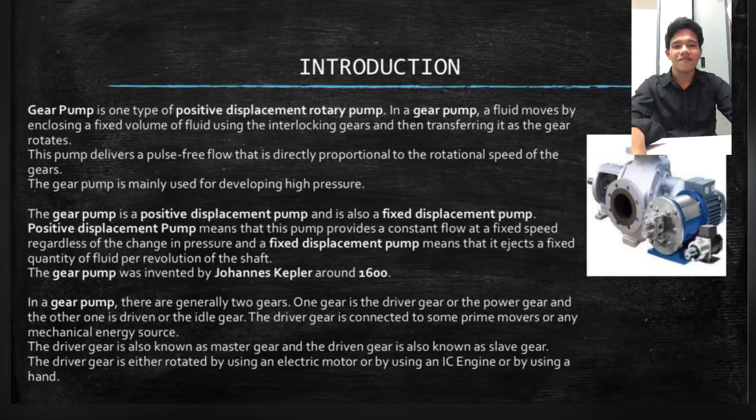Next slide. I will present to you about components of a gear pump and function of components of a gear pump.

This is a component of a gear pump. We have driver gear. Secondly, we have driver shaft. Thirdly, we have casing. Fourthly, we have driven gear or idler gear. Next, we have inlet, which is low pressure fluid. And fifthly, we have outlet, which is high pressure fluid.

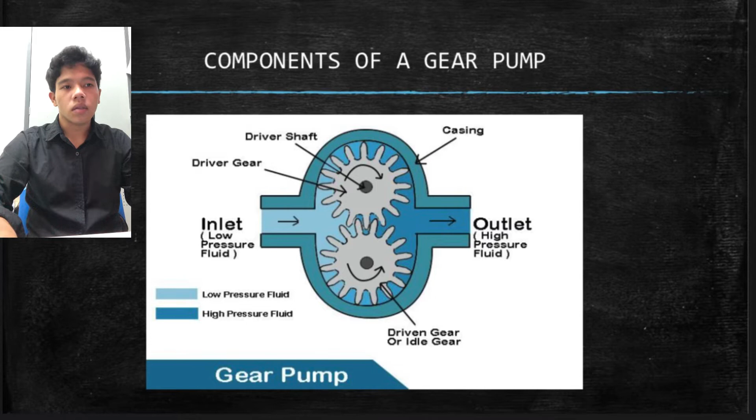Function of component of gear pump. Point number 1, driver gear. Driver gear is connected to the prime mover. It rotates using the power from the prime mover.

Point number 2, driven gear or idler gear. The driven gear is in mesh with the driver gear and rotates as the driver gear rotates. Point number 3, casing. Both the driver gear and the driven gear are packed inside the casing of the gear pump.

Point number 4, inlet section or suction side. It is the section in the gear pump through which fluid enters the gear pump. Low pressure liquid enters the pump from the inlet section. Point number 5, we have outlet section or discharge side. It is the section in the gear pump through which pressurized fluid is delivered to the required area. High pressure liquid flows out from the pump from the outlet section.

Point number 6 is prime mover. In the gear pump, the prime mover is used to provide power to the shaft in which the driver gear is mounted. It can be an electric motor or an IC engine, or it can be manual labor.

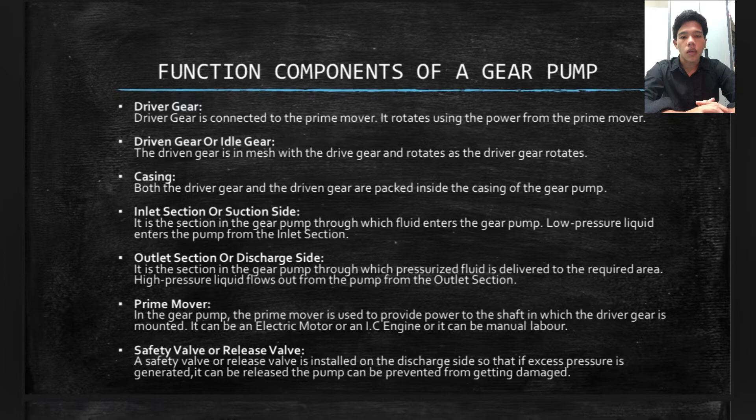After that, I will present to you about the operating principle of gear pump. At starting, the gear pump is started by providing power to the driving shaft, and the driving gear starts to rotate using the power from the prime mover.

Point number 2, the driven gear, which is in mesh with the driver gear, also rotates as the driver gear rotates, but in the opposite direction. Point number 3, as both the gears start rotating, a partial vacuum is created on the suction side.

As the vacuum is created, the liquid in the suction side gets sucked toward the gears. After that, the sucked liquid gets trapped between the gears and the casing. Point number 4, then the trapped liquid between the casing and the gear teeth travels along with the rotation of the gear teeth and moves from the suction side toward the discharge side.

Similarly, the liquid flows from the suction side to the discharge side in the idle gear also, and high pressure liquid leaves the pump from the discharge side.

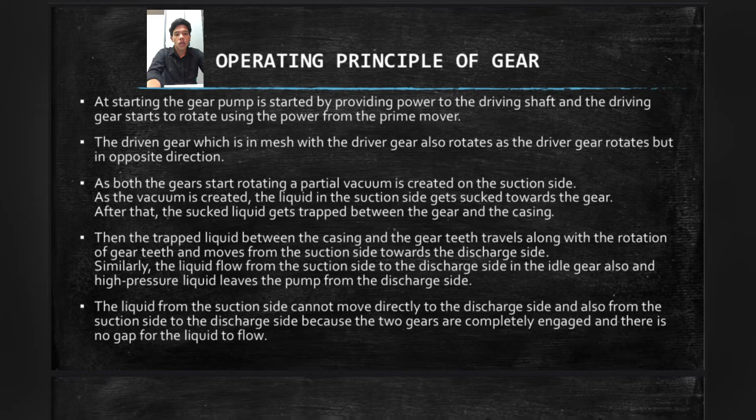Point number 5, the liquid from the suction side cannot move directly to the discharge side because the two gears are completely engaged and there is no gap for the liquid to flow.

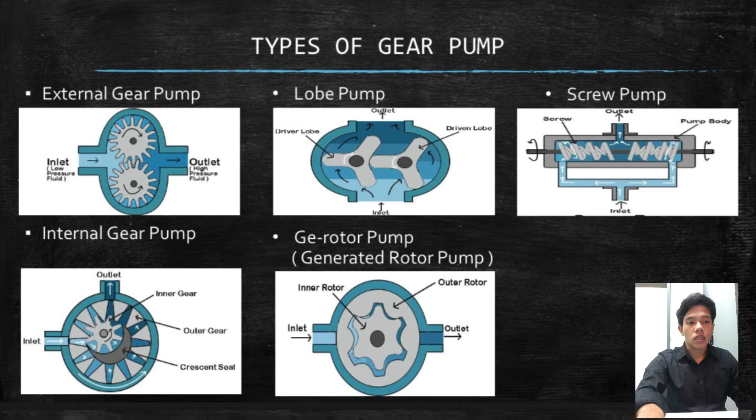Not to forget, in the gear pump there are many types. For example, number 1, we have external gear pump. Secondly, we have lobe pump. Thirdly, we have screw pump. Fourthly, we have internal gear pump. And lastly, we have Ge-rotor pump, generated rotor pump.

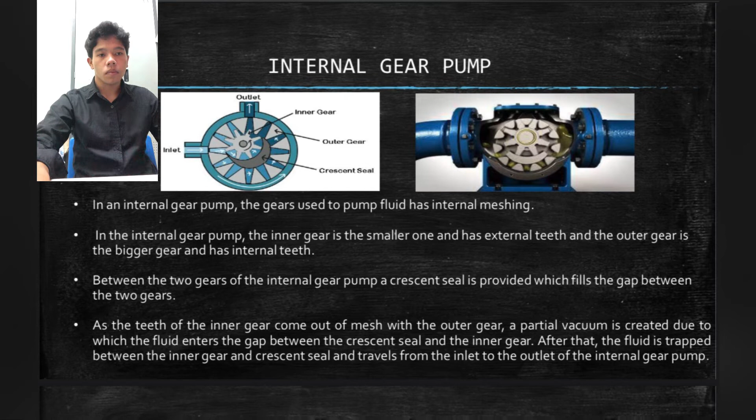For your information, I will take one type of pump to present. The type of pump I will present is internal pump. In an internal gear pump, the gears used to pump fluid has internal meshing.

Point number 2, in the internal gear pump, the inner gear is the smaller one and has external teeth, and the outer gear is the biggest gear and has internal teeth. Point number 3, between the two gears of the internal gear pump, a crescent seal is provided which fills the gap between the two gears.

Finally, point number 4, as the teeth of the inner gear come out of mesh with the outer gear, a partial vacuum is created, due to which the fluid enters the gap between the crescent seal and the inner gears. After that, the fluid is trapped between the inner gears and crescent seal and travels from the inlet to the outlet of the internal gear pump.

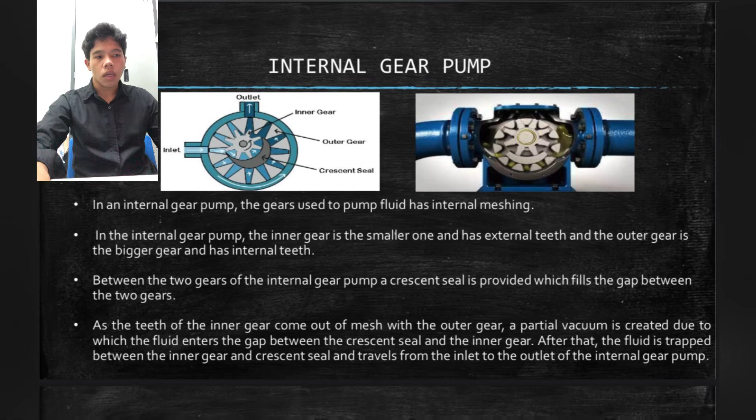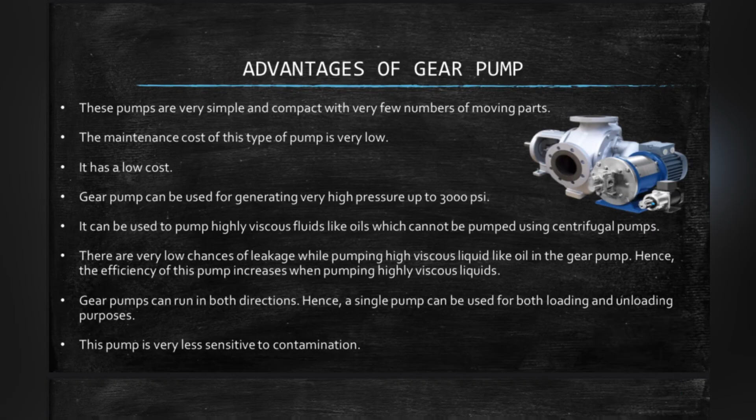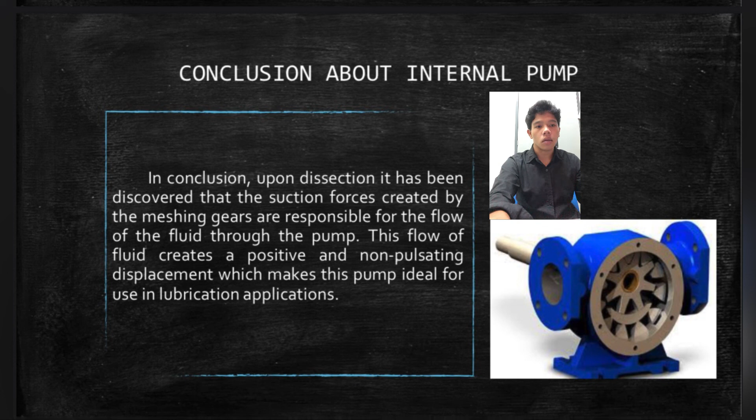Finally, the conclusion found for the gear pump is: upon dissection, it has been discovered that the suction force created by the meshing gears is responsible for the flow of the fluid through the pump. This flow of fluid creates a positive and non-pulsating displacement, which makes this pump ideal for use in lubrication applications. Okay, thank you.